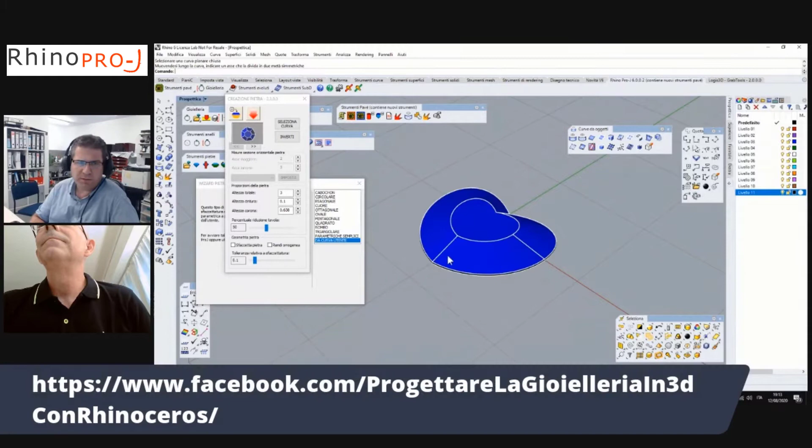For example, I can select my personal curve, starting with a custom curve that I created myself.

I can change the dimension, because the software is parametric. And this is my personal stone.

In this case, I can create my personal bezel here, through the shape of the stone.

Yes, it's very easy to use because it's very simple. You can change the measure and it is very, very easy. It's a system made to be very intuitive.

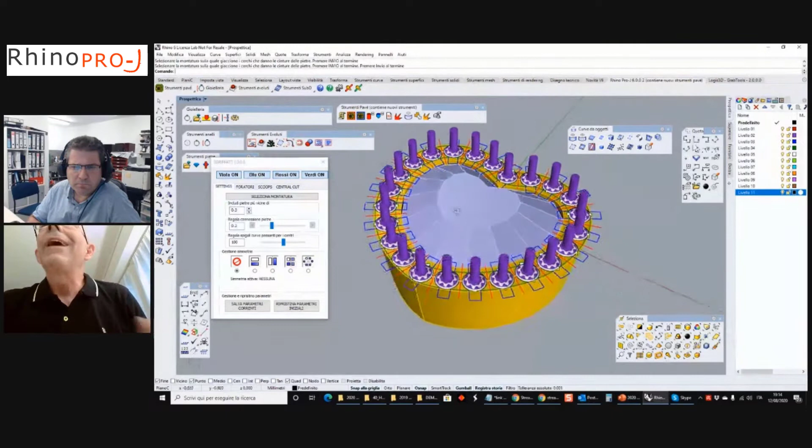This is another plugin, very interesting, because it's possible to select the bezel and the software creates the drill to prepare the model to set the stone. Another interesting function of the plugin is to directly create the cutters on the ring we've generated, the bezel in this case, so it can be set.

Yes, and this is finished because the software creates all the drill, also inside. And this, you can see, is the drill. The software has automatically created the cut for setting the stone in the piece.

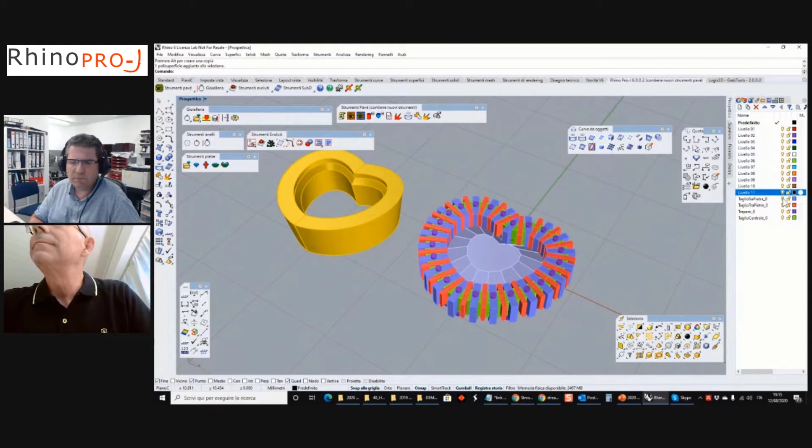For example, I have my personal stone, and another application is to create a ring. This is very simple. I can define the diameter, for example 16, and select my stone. Here we've taken the same stone from before, the custom one, generated a ring, and applied the design of this ring with our stone automatically.

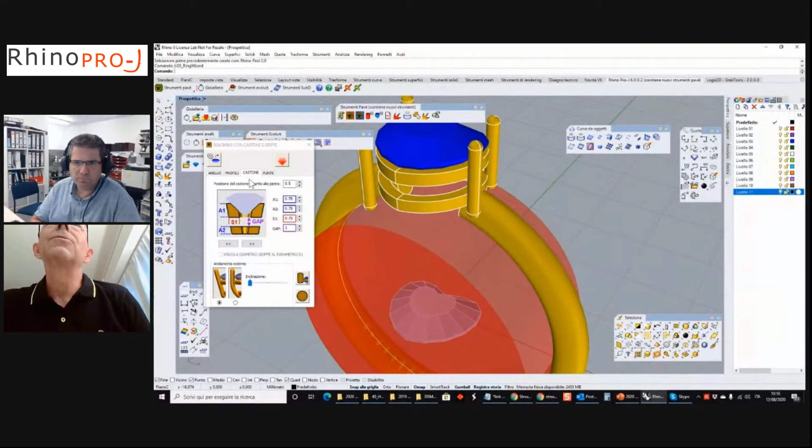Here it's possible to change the profile. We can change the height of the stone, because the software in this case is parametric. Since the software is parametric, we can adjust the profile of the ring's arm, the height of the stone's setting, or the position of the prongs.

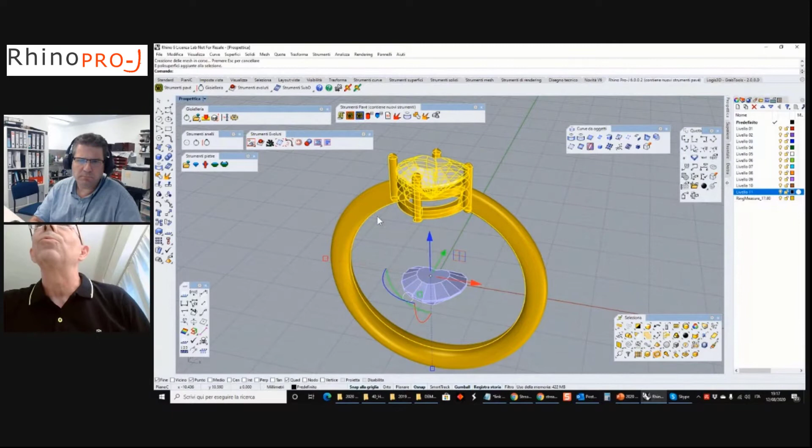And when I decide all the stone, all the parameters, the model is very easy to create. Once the parameters I want are selected, it's very easy to generate a classic jewelry ring.

For example, another example: we can create 3.2, for example, okay, this, and now I want to create a trilogy. Now we change the stone for a more normal one and move on to creating a trilogy ring.

It's enough to select my stone, change the bezel. In the top view we can define the position. We generate our trilogy ring from the stone. From the top view we can more easily adjust the position of the prongs.

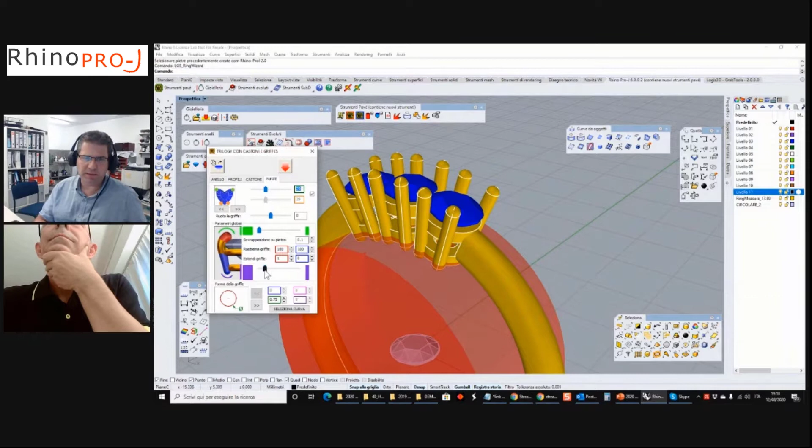We can change the parameter here, changing the parameters of the arm.

And the ring now is ready for production. But, for example, when I apply the Boolean operation, the model is finished. But if it's necessary to create the rendering, it's not very good to have straight prongs. But I prefer, for example, only for the rendering, to have this.

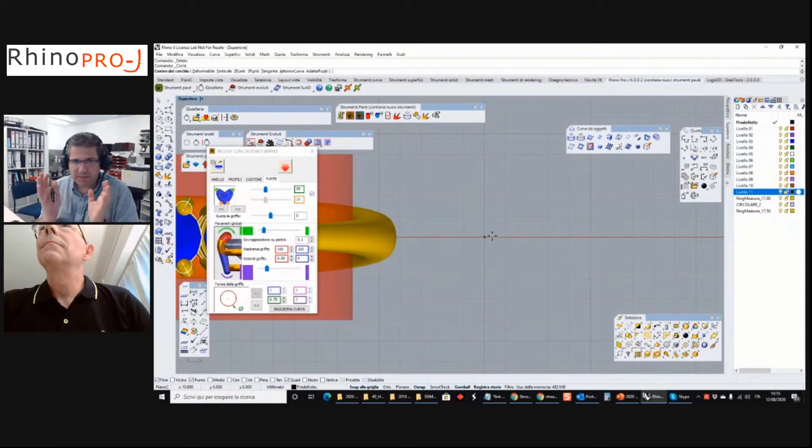Yes, for example, I want to create my personal... I have a question for you. Yes, I have a question.

This possibility of moving the prongs, of closing the prongs, is it also good for wax setting? Yes, of course, yes.

Quería comentar que esta posibilidad de girar las puntas hacia adentro es buena, como él dice, para el render, pero también es buena si vamos a hacer engastado en cera, porque necesito que la pieza quede fijada y no se caiga después durante la fundición. Entonces, para hacer el wax set, es decir, engastado en cera, también va bien esta curvatura de las puntas.

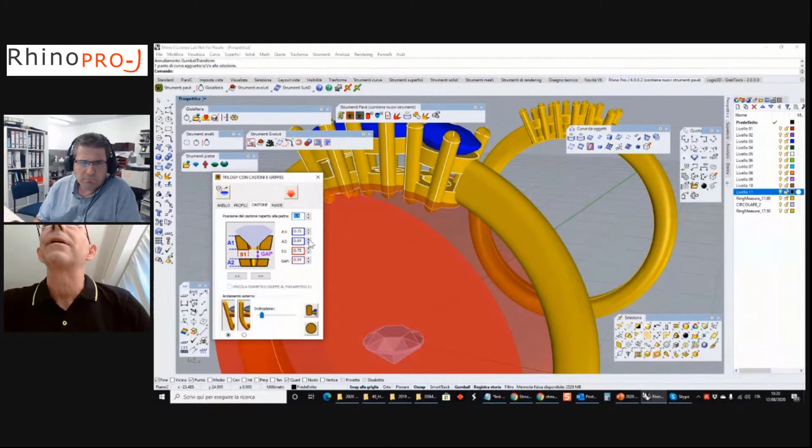Yes, for example, if I want to create my personal griff, it's possible to change any parameter you want. It's very, very easy. But if I want the griff with this section, I select my curve, and you can see I have my personal griff.

Ahora, para cambiar los engastes, las puntas del engastado, la forma no tiene por qué ser redonda. Él puede coger cualquier forma, en este caso ha cogido una línea de corazón, y la ha aplicado sobre la pieza para que las puntas queden con forma de corazón.

And this is my ring, very, very easy. Of course, we can change, for example, the diameter, for example 17. I'm going here, and this is another one.

Por supuesto, es tan sencillo como cambiar el diámetro del aro para cambiar la medida del anillo, manteniendo la pieza y poder generar todas las medidas automáticamente, con un solo clic.

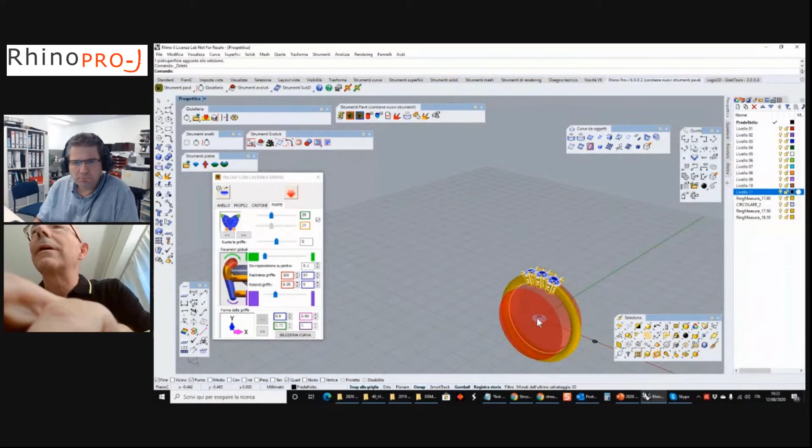Other application on classic jewelry, for example, we can use other function. Okay, and now I can create, for example, the wedding ring, for example, I use this.

The philosophy is the same because I can set, for example, the diameter, okay? I can define a stone. In this case, for example, I can set a square stone, 3.2.

En este caso, ha cogido la posibilidad de hacer una alianza con piedras y ha cambiado la piedra. El sistema es muy similar al de cualquier otro tipo de anillo clásico. En este caso ha cambiado las piedras para meterlas, por ejemplo, una piedra cuadrada, que quedaría muy bien en ese tipo de pieza.

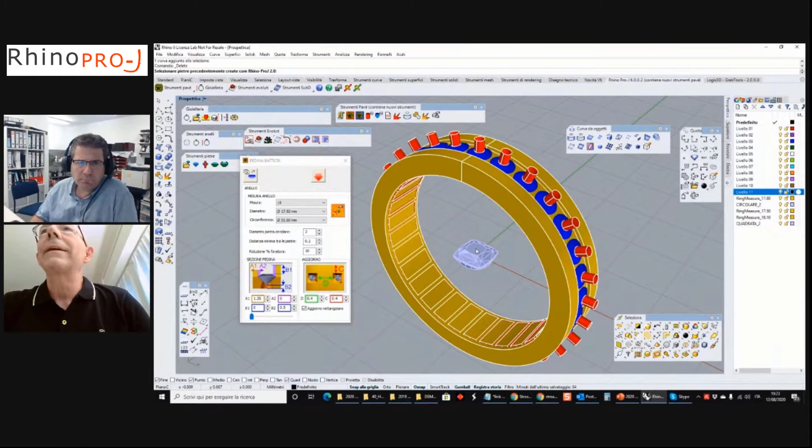In this case, it's enough to select my stone and the software changes. Here it's possible, of course, to change anything you want. When you decide, for example, the distance from the stone, you can see.

Ahora, por ejemplo, está cambiando la distancia entre piedras para que visualmente quede más el efecto que desea y editar cualquier otro de los parámetros de la alianza.

And then the software can create the final model. Ahora ha creado el modelo final, como vemos, realizando incluso los taladros para las piedras.

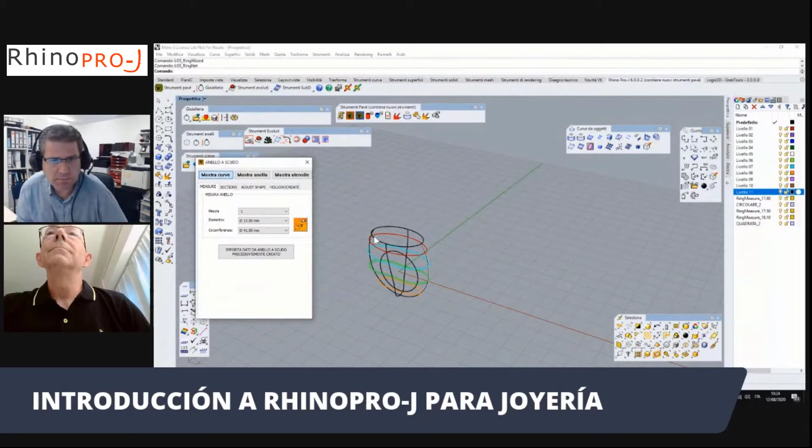Okay, the next function for jewelry is, for example, to create a shield ring. La siguiente función será crear un anillo de sello. Cambiamos el diámetro. Yes, here we have some profiles, but we can define, for example, my personal profile. Tenemos algunos perfiles en la galería, pero podemos crear el perfil que queremos personalizado.

Yes, now I apply the fillet. Okay, and I can select my personal curve, user curve. And this is my ring. Ahora ha generado la curva, la ha unido y finalmente la ha aplicado sobre el anillo para que tenga la forma de la curva que le interesa, que ha creado.

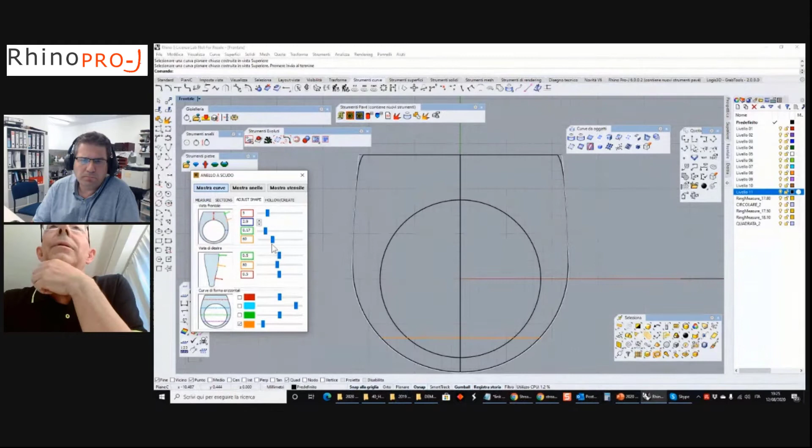Of course, it's possible to change the shape very easily. You can see I can change the profile of the curve. Fácilmente se puede cambiar el perfil de las curvas que generan el anillo.

Yes, and for example, we can create the drill to remove the material inside. Es también posible generar el taladro que agujereará el interior del anillo para que sea hueco.

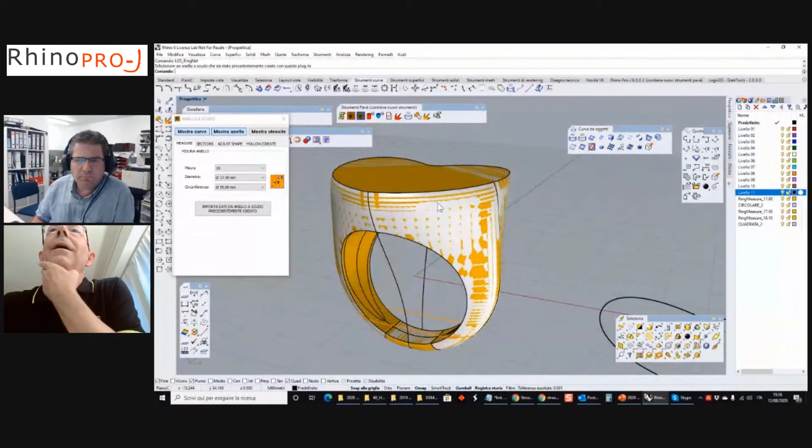For example, now I have my ring. Yes, it's interesting because I can create my personal database, because when I reopen Rhino, for example, I can select my ring, and if I want, it's possible to change the diameter. Es interesante que podemos crear nuestra base de datos personal y retornar a nuestro anillo para hacer las modificaciones que estimemos entre tamaño, forma, etc.

Y crear, por lo tanto, una colección muy rápidamente, o unas variaciones del mismo modelo. Yes, this is the second one with a different diameter. En este caso, el primero y el segundo tienen diferente diámetro para dedos distintos.

Okay, but it's possible also, for example, to apply not a shield but a rounded surface. Está bien, es posible crear un anillo de sello, pero en vez de ser rectilíneo como el otro, con curvas más redondeadas.

Okay, this is the ring. You can see it's not flat. En este caso vemos que no es liso, sino redondeado, como hemos comentado.

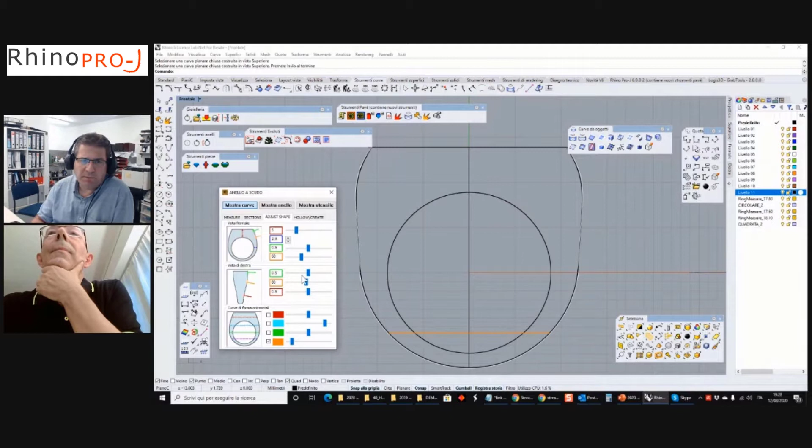Now I change the dimension. Cambia las medidas, the profile in right view. Okay, and in this case, this is the drill. I can change, for example, inside or...

Ha seleccionado el cortador y ahora está cambiando el formato interno. But it's possible, for example, to add some particular curve, for example, code, yes.

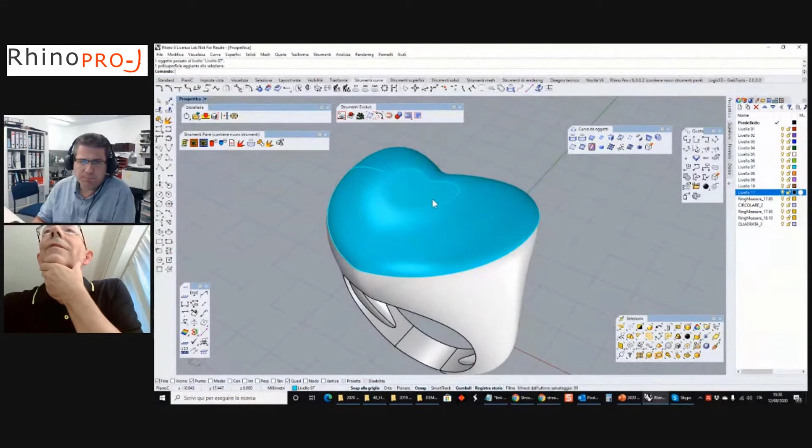Okay, this is my personal ring, and now I want to apply the second function of Pro-J, which is Pave Tool. Now we have our customized ring, but now we're going to create a pavé on it with the Pave Tool. For the software, it's important to tell it where I want the stones. The first thing to indicate is where we want to place the stones, and that's done by defining the curves. Yes, this is the polysurface where I want to put the stone.

The software asks me to select the polysurface where I want the stone, check the direction and the inner part, and you can see the polysurface become gray. This means this is the polysurface where I want to put the stones. The software asks us to define the polysurface, confirm the direction of the surface and the inner part of it. Once we've selected all this, the polysurface I'm going to work the pavé on is marked in dark gray.

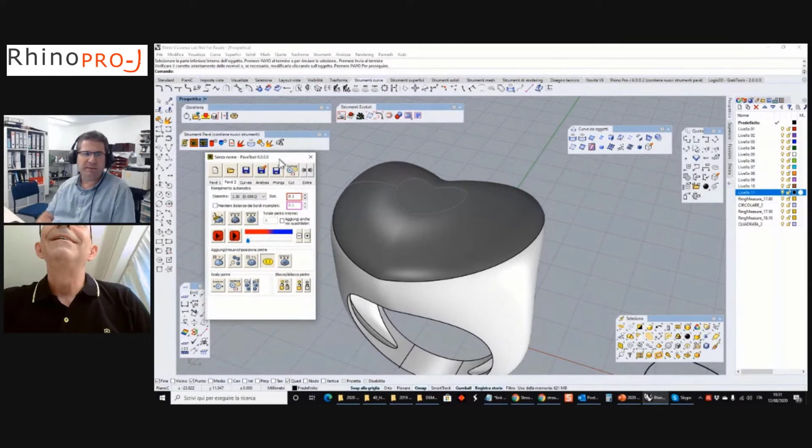Now I want to show you the editing. This is a very important function, because the most important brands in Italy use Pave Tool to create wonderful rings. But this is very complex, and we don't have time to show all the functions. The editing possibilities for pavés are very complete in the software. There's a very large company in Italy, probably the largest jewelry manufacturer in Italy, that uses this tool, and it's very complex. But we'll show the basic parts for generating these pavés.

Okay, now I wanted to show you the editing of the software. Of course, it's possible to add manually, for example without overlapping. With the keyboard, it's possible to change things, only using the keyboard. Using the keyboard, it's possible to place stone by stone, and with the keyboard I'm adjusting the size of the stone, and I can tell it I don't want it to exceed the level.

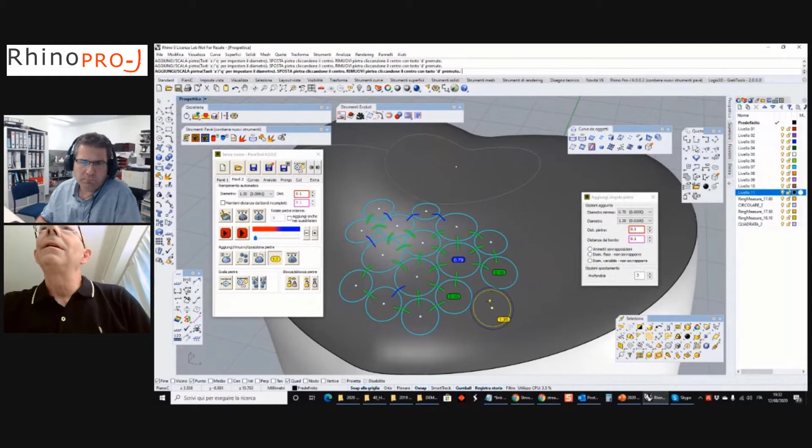Yes, this is editing. In this editing, it's possible to move the stone. You can see I move the stone, but this number 3 is very important, because, for example, if I change it to 1, it's only possible to move one level. It's possible to move the stones we've generated, but we can also define, as he mentions with 1, 2, or 3, the zone of stones that move, meaning keeping a movement zone that isn't complete, but partial.

You can see that when I move the stone it becomes gray. This means that the position of the stone is fixed. When we mark the stones so they turn gray, those stones stay fixed in that position and they won't move anymore while I continue editing the rest of the pavé set.

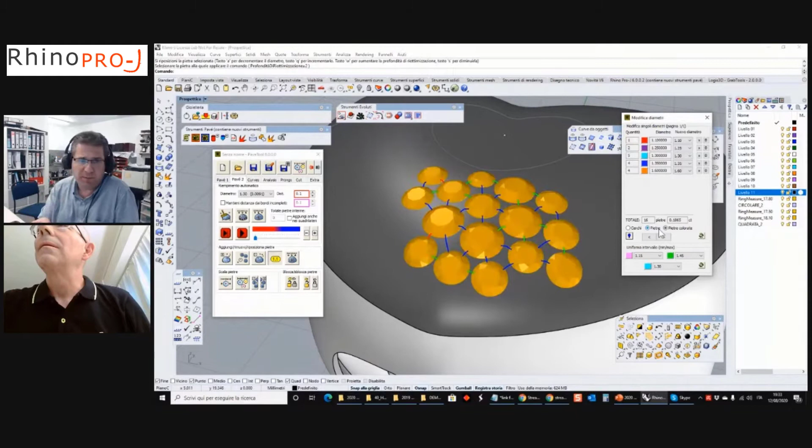It's possible to see the circle, but it's also possible to see the color, because we can define, we can take the stone from the database. It's possible to simply see the circle, or you can see the stones, even the stones in colors, marking a different color for each stone size.

Of course, it's also possible to change the diameter in real time. You can see, maybe it's better this way. Okay, I use the keyboard, Control and Shift, and it's possible to change the diameter. It's also possible to change the size of the stones in real time, as shown now.

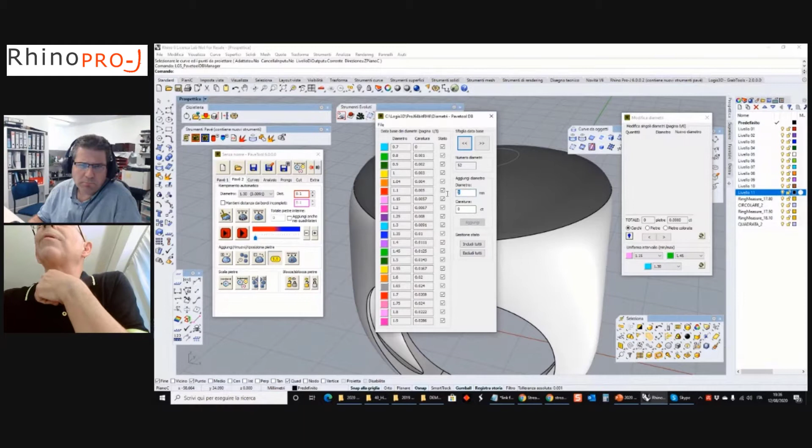We can set the stone, of course. For example, if you don't have your personal stone, go here, open the pavé database, and you can see it's possible to add my personal stone, for example 1.85. This is my personal stone. It's possible to personalize my database, the stone database with our real or personal stone measurements that we have available.

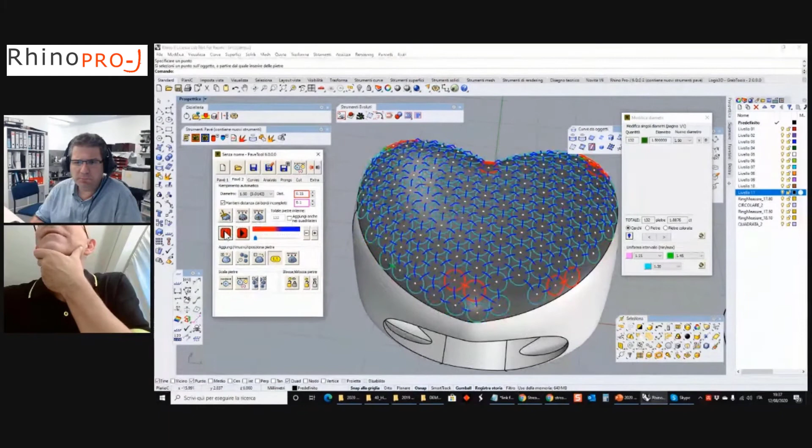In the first step, this is very easy to create the pavé. I define the diameter of the stone and the distance between stones. A good way to do it is first define the diameter of the stone and the distance between stones, I can set the orientation of the pavé - we select the orientation of the pavé - and this is the first solution.

Of course, the model is symmetric. We can activate the symmetry. If the model is symmetric, as is the case, I can activate the symmetry function.

You can see it's not very good. This solution is not for high jewelry because you can see it's not correct. But going here, with the keyboard I can change the diameter. This solution is fast, comfortable, but maybe not the most adequate for high jewelry, because the shape isn't perfect. However, we can start like this and create some stones at another diameter to correct the shape.

Yes, but you can see it's very interesting. The solution is very regular. This solution is very interesting and also achieves a very regular finish.

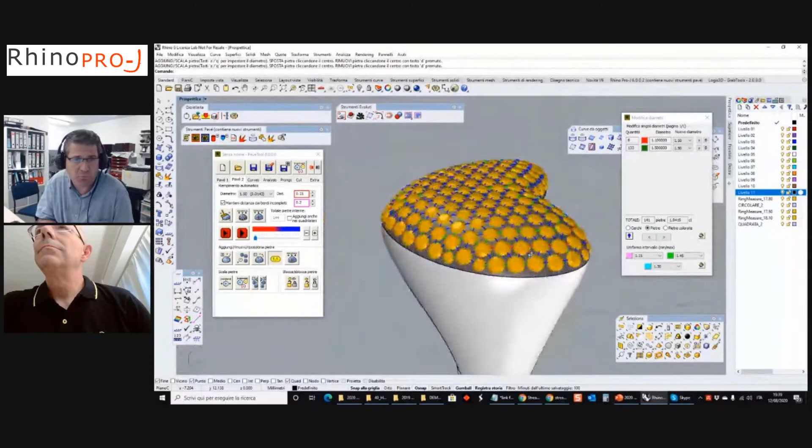For high jewelry, it's necessary to use another solution. For high jewelry it's necessary to use another type of solution. This solution means creating, filling, putting the stone in a very exact way at the edge. For this type of solution, for high jewelry, it's necessary to control very well where we place those stones.

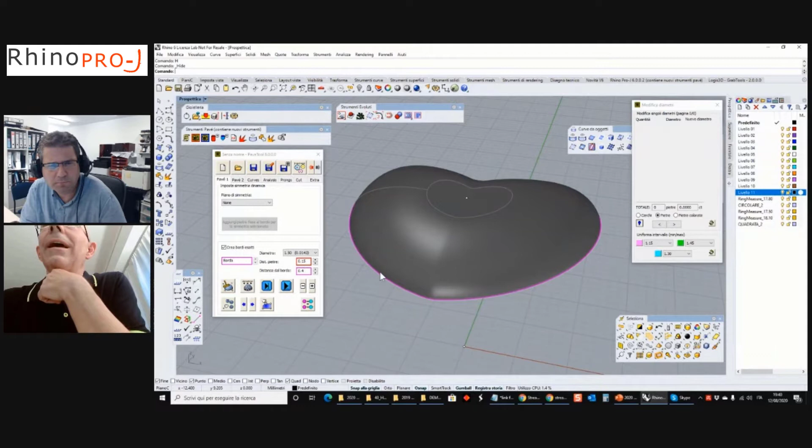You can see when you activate exact edge, you can see the purple line, and I set the distance between stones, the distance from the edge, 0.4 for example, and the software places the stone. In this case, it selects the pavé boundary line, we tell it the distance between stones, but also the distance we want from the bottom of the line - in this case 0.4 millimeters - and it creates the line for us.

Here you can move the stone, you can see it's possible to move the stones to achieve the central point as the base that interests us.

For example, but in this case it's important to put one stone in this position, in symmetrical configuration. In this case, for example, it's very convenient to have a stone centered exactly at the symmetry point so that the pavé comes out perfect.

In this case, I define and check this point, and I remove all and apply again, and you can see the stone become gray. This means that it's exactly where I want the stone.

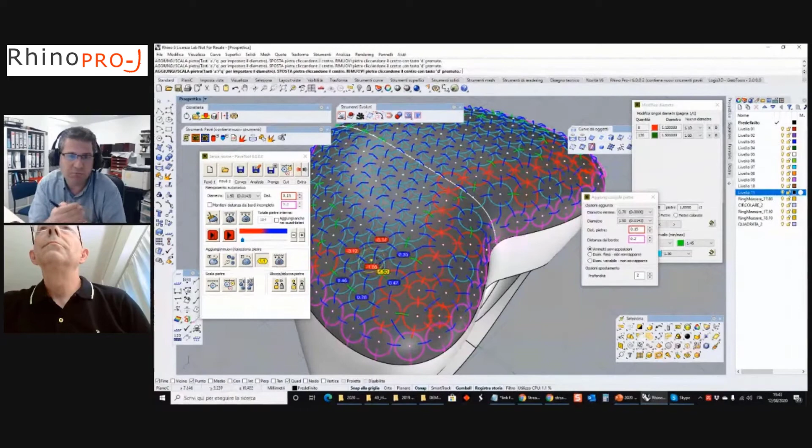El segundo paso será rellenar la superficie con piedras. Of course, the pavé doesn't have a solution because there isn't a mathematical solution, but the software, you can see, is important in this case to activate symmetry. El pavé, manteniendo el tamaño de la piedra como hacemos nosotros, no tiene una solución perfecta, porque siempre quedará alguna parte donde no es posible poner una piedra de esa especialidad. Pero nos acercamos a ello y aplicamos la simetría, añadiendo alguna piedra más pequeña para crear el pavé más perfecto posible. You can see this is a very good solution, the pavé is good in this case.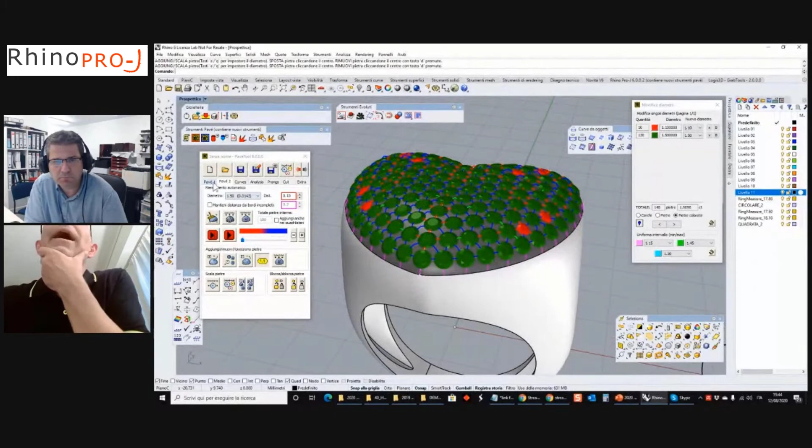En este caso vemos, por eso es una solución más profesional, como el pavé, vayamos al punto que vayamos, crece bien, perfecto. You can see we can solve the pavé using the first important diameter, 1.50, and only 2 different stones. En este caso hemos generado un pavé profesional, perfecto, en una polisuperficie con solo un diámetro principal y un diámetro de piedra secundario. And you can see in some minutes it's possible to solve the pavé. Como vemos, en pocos minutos es posible generar un buen pavé.

Of course, when I finish, it's possible to save the pavé. También es posible salvar el pavé. My pavé. The file name is PTD, pavé tool data. El formato es pavé tool data, que es PTD, que es el formato en el que se guarda la configuración del pavé, ¿se entiende? Para otras piezas que quiera generar igual.

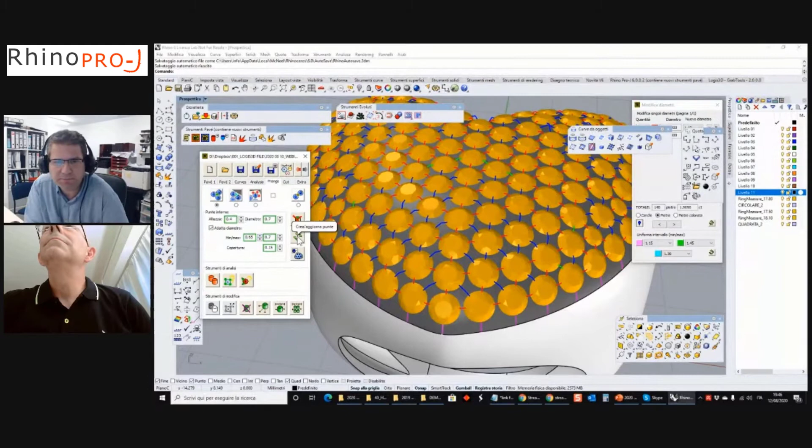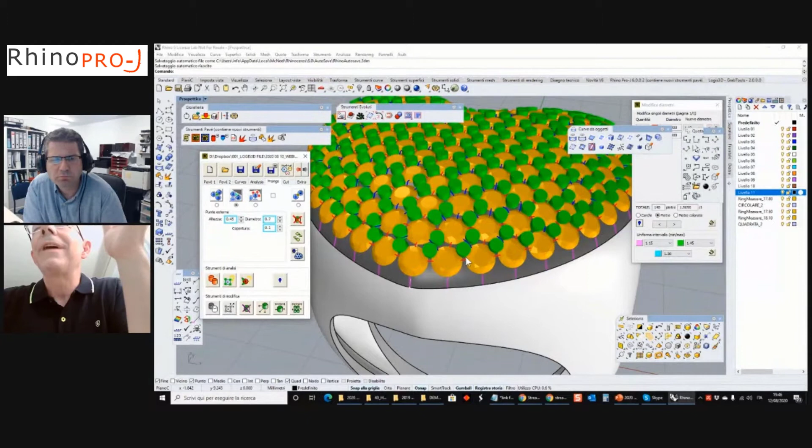Now, for example, the next step is to insert the prong. El próximo paso es generar las puntas del pavé, del engastado. I defined the height of the prong. Metemos la altura de las puntas o garras. This is very important, you can see it's possible to create the prong inside with a different diameter than the prong outside. Es posible también generar en este software un diámetro distinto de las garras interiores del pavé que de las garras exteriores. This is very important because it's necessary to have the diameter outside bigger than inside. This is important because we can have a very, very strong pavé. Esto es muy importante porque la garra exterior es la que soporta el peso estructural del pavé. Entonces es muy conveniente que las garras exteriores sean más grandes que las interiores.

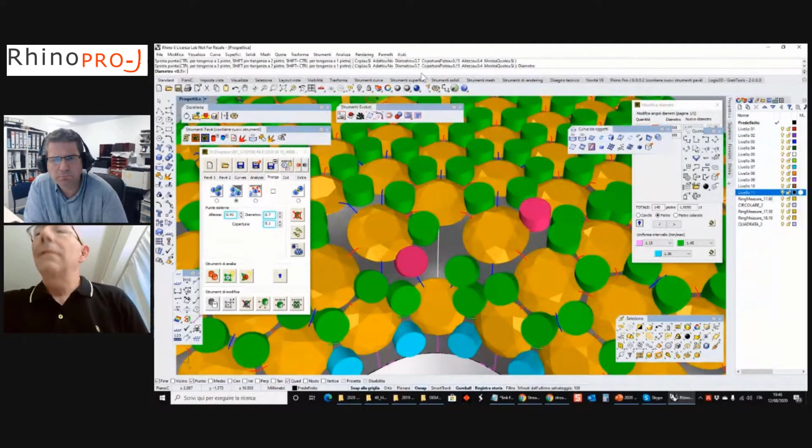Of course, we can have many functions here for editing the prong. Existen muchas funciones distintas que me permiten desde el software editar estas garras o puntas que sujetan las piedras. For example, we can change the diameter only using the keyboard. Incluso utilizando simplemente el teclado puedo modificar los diámetros. Or we can move, for example, find the tangent between only one stone, 2 stones, or 3 stones. Incluso podemos moverlo buscando la curva tangencial entre las 2 o 3 piedras de alrededor. When I decide the prong is okay — for example, in this case it is not correct — but of course, I need some minutes to create, not only 5 minutes to create the pavé. It's necessary more time. Lógicamente necesitará un poco más de tiempo, más de 5 minutos, para realizar el pavé, pero...

Okay, now I want to create the prong. You can see the prong, we have many different types, for example this one, and also personal prongs. También podemos definir la forma que tendrá la garra. En México le llaman uñas, no sé cómo lo llamáis en Colombia. Es posible modificar la forma de esta garra a una de las que tenemos en galería o a una especial que diseñemos nosotros. In this case, the software applied the Boolean operation, you can see. En este caso, el software ha aplicado la operación booleana al acabar de configurar las uñas.

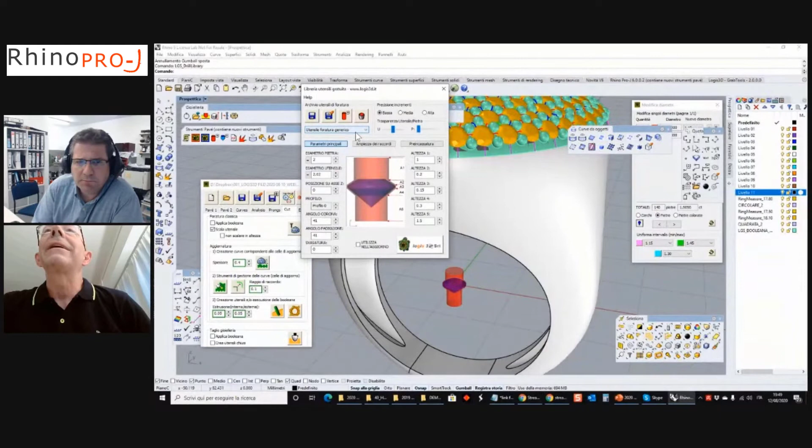The next step is the cut. El próximo paso es el corte. In this case, we use the plugin, the name is Drill Tool. It's possible to create a parametric drill to cut the model. Utiliza la herramienta de taladro, Drill Tool, para realizar el corte de las garras. Of course, the software created the drill, you can see the drill, and you can see the layer where you can find the drill.

El software te permite ver dónde está la capa en la cual ha realizado el taladro. Pero en joyería esta no es la mejor solución.

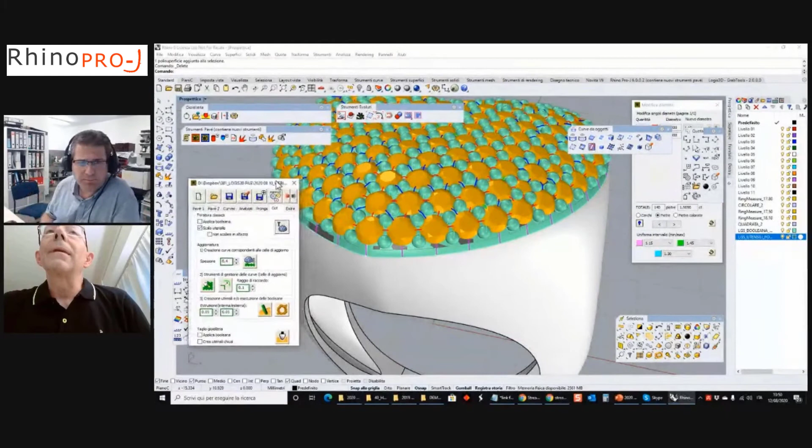Yes, en joyería de alta calidad es necesario crear el ajour. El ajour es muy, muy potente. Es necesario en alta joyería crear lo que llamamos el ajour. No conozco palabra en español de eso.

Because in this case, to create the cut, it's necessary to tell the software where I want the cut. Es necesario decirle al software dónde quiero realizar el corte.

And in the cut, I want to create the cell. Entonces tengo que crear la celda del corte. The software tells me: select the curve. El software nos dice que seleccionemos la curva. And now the software can create the cell.

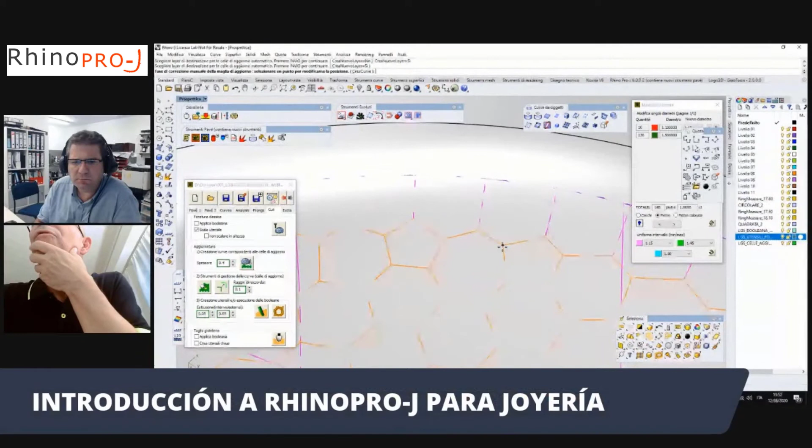You can see, yes, and it's possible also to change. El software crea las celdas y es posible también editarlas. Create curve. Some cell is not very good, but the software tells me this. Okay, this is not good.

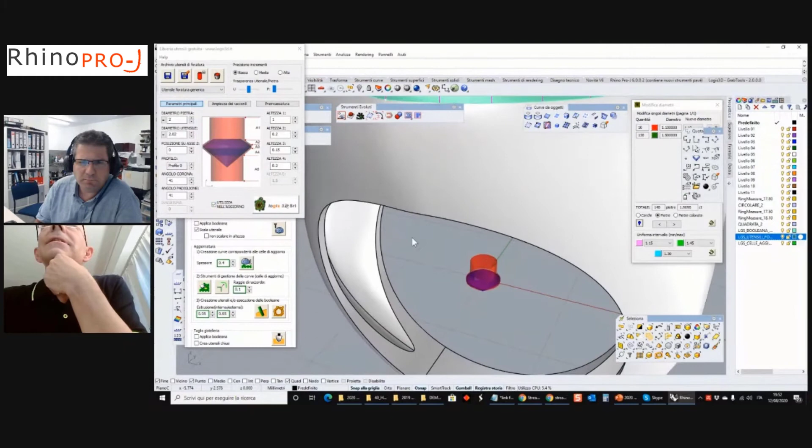Yes, and in this case, I want to create the drill. This is the drill. En este caso, crea el cortador. And then it's possible to create the drill.

I need to verify that all the cells are closed. Necesita confirmar que todas las celdas que ha creado están cerradas, porque si no falla la herramienta. Yes, because, yeah, okay, it's okay.

And for example, we can create only the drill. I select this, you can see the red point. The red point is the center of the stone. And then I can select the cell. Crea el cortador que está en el centro de la piedra, selecciona las celdas.

And now here we have all the drill. Y ahora ya tiene realizados los cortes.

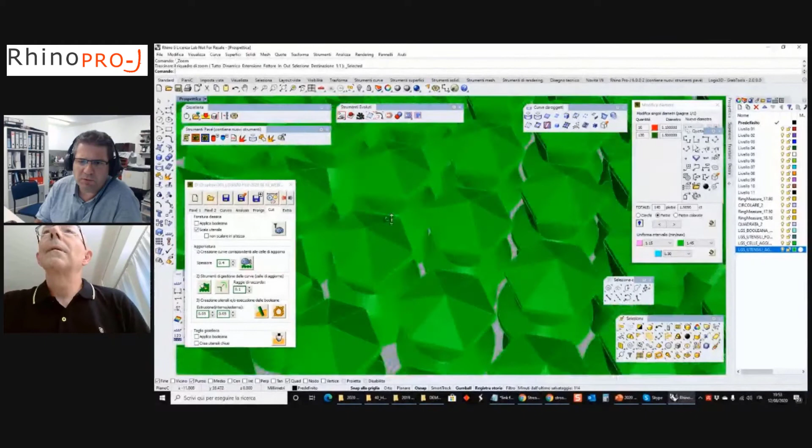This is very interesting, this value: 0.05 by 0.05, because this is very important to give the pavé more light, and the ring is not so heavy. Este parámetro que vemos aquí, esta altura que tiene en la parte baja, que en este caso es de 0,05 por 0,05, pero podemos editarlo. Esto es muy importante para dar luminosidad al pavé, para que entre más luz por debajo. No sería lo mismo que cortar en recto, sino que sea más grande la entrada que se va estrechando. Este pequeño corte le da mucha luz al pavé.

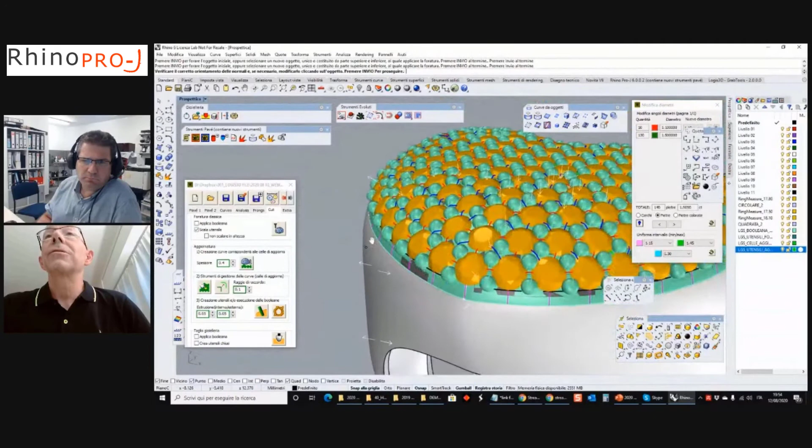Now I want to apply the Boolean difference. Apply Boolean: the software asks me to select the model, this model, and this. Okay, the direction is okay. New layer, okay. The software asks me to select the drill, the red point, enter.

And now I need to select the cell. In this case, I don't want to select all the cells because it takes too many times to apply all the Boolean difference. Ahora va a realizar una booleana distinta en la que selecciona las diferentes superficies, y como este tipo de booleana es más lento y más complejo, lo que hace es seleccionar solamente unas cuantas celdas, pero podría hacerse perfectamente en todo el resto del anillo. Pero tardaría más, claro, la operación.

In this case, the software creates one cell, applies the Boolean difference, then deletes the old drill and applies a new Boolean. This is to reduce the time of the Boolean operation. Yes, it's finished. Puede hacerlo por partes para reducir el tiempo de booleana.

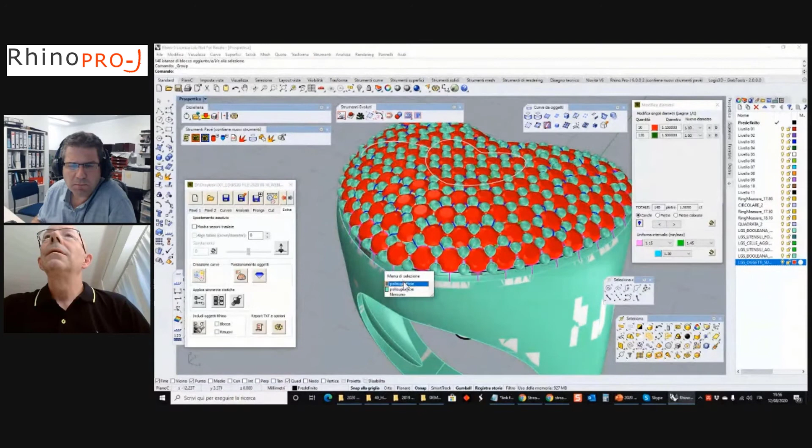Okay, and I'm going here. Selecciona, selected. Okay. Yes, this and this. Y ahora vemos los taladros.

This is of interest not just in Italy, but in the world, because it's very, very beautiful. The solution is very beautiful. The pavé takes more light and the model is not so heavy, because now the price of gold is very, very high. It is important to reduce the weight of the ring.

Este sistema de generar los agujeros con más luz, digamos, con esta entrada de luz mayor gracias a este rebaje exterior, aparte de que le da mucha más luminosidad al pavé, nos permite también ahorrar costo, porque ahora que el oro está tan caro, si podemos reducir esa cantidad de oro, la pieza pesa menos.

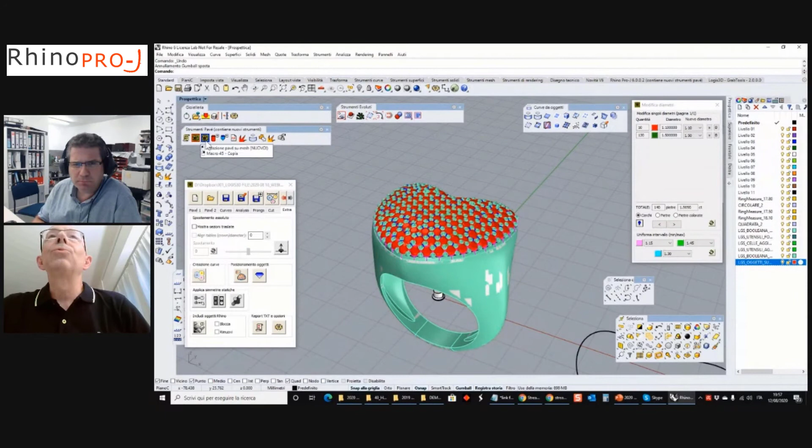Yes, okay, this is the solution for the polysurface. And now I wanted to show the pavé tool applied to mesh. We have seen the pavé tool solution for polysurfaces, and now we will see the pavé tool solution for meshes.

In this case, I use another plugin that you can find on Pro-J, called Art Tool. With this plugin, it's possible to create a 3D model starting from one image. For this we will use a Rhino Pro-J tool called Art Tool, which allows creating 3D models from a photograph using light and shadow.

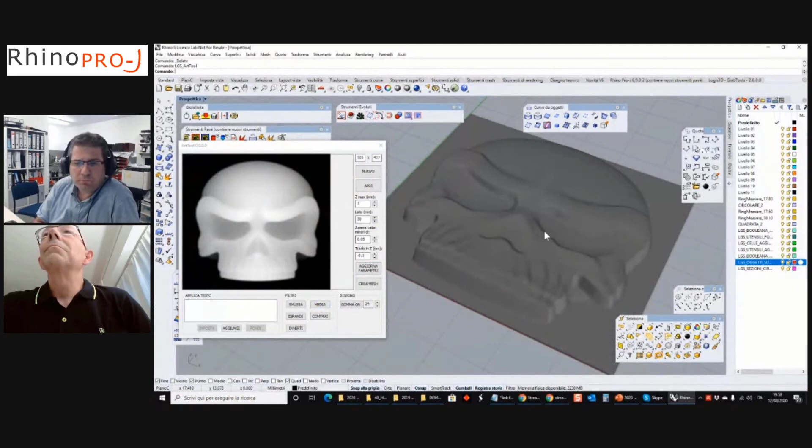Yes, this is, for example, it's possible to add text. It's possible here to write and apply the text on the image. With this Art Tool it's possible to write a text and have that text applied on the mesh.

Now I have the model, and in this case it's necessary to remove the bottom mesh. In this case it's necessary to cut the lower part of the mesh. I apply trim mesh, a tool called Trim Mesh.

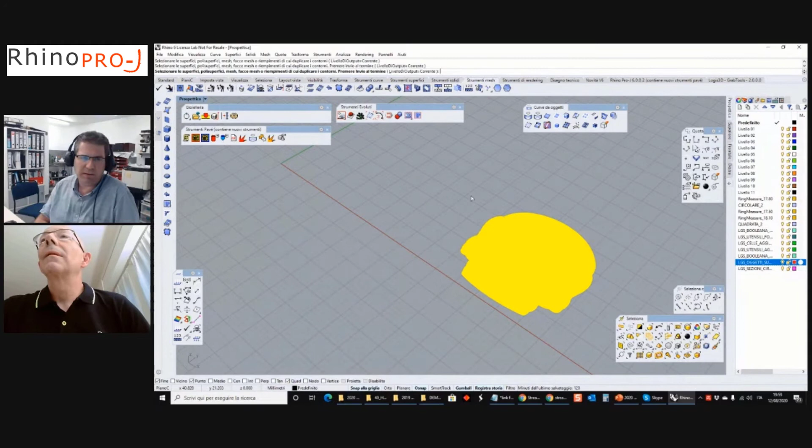But now it is very easy, for example, to create a ring from this shape. It's very, very easy to create a ring from this mesh, because I can use this function, the shield ring function.

Shield ring, I want to select, for example, 20. Let's do it with number 20. And my curve is this, okay, this is my curve. Here, of course, we can change all the parameters. I apply my curve and edit the parameters.

Okay, the drill, it's necessary to change this value. Yes, and now I can create the ring. And now the ring can be created.

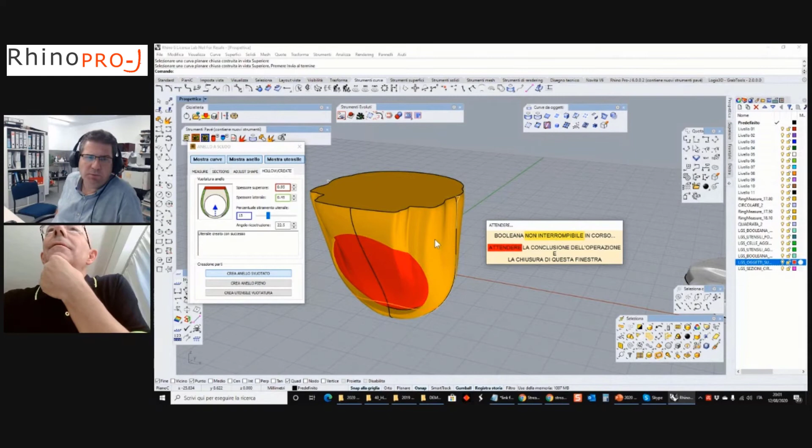This is a very difficult shape, very complicated. Okay, now I take this and I put this shape on top of the ring. Now I select the mesh and place it at the top of the ring. You can see it's very, very easy.

Now it's necessary to tell the software where I want the stone. Now it's necessary to tell the software where we want to place the stones.

For example, this function isn't in Rhino. This means it's impossible in Rhino to create a curve inside the mesh. This is a function that Rhino doesn't have, that is exclusive to Rhino Pro-J, for creating a curve inside the mesh.

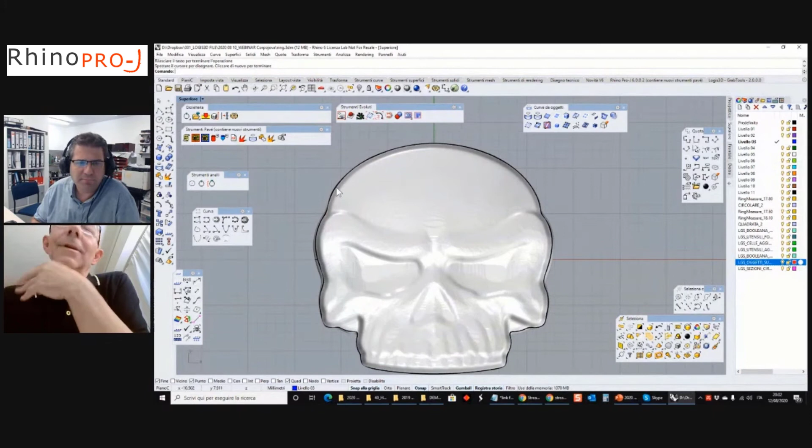Yes, because this is Rhino's function, draw curves on mesh, but you can see it's not useful. This is Rhino's function. To apply, click, this doesn't work very well. I think it doesn't work. But we have another function.

The name is curve on polysurface or mesh. I select this, you can see I can click to apply it, and I decide this is a very good curve. This is the reason it's better than Rhino, on polysurface and on mesh.

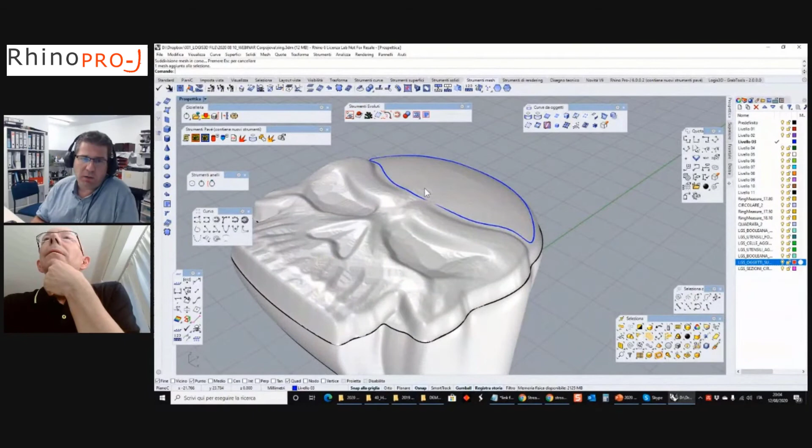Okay, when I decide the curve is okay, in this case I can create and apply, for example, split mesh. Once I've decided the curve is to my liking, I apply it on the mesh in this case, and join it. And this is the mesh - what I do is split the mesh with this curve.

Yes, and I can create pave tool on mesh. So, since I've already cut the area, selected the area where I want to apply it, I can now apply pave tool on the selected mesh. Yes, this is the same function as the previous pave tool on polysurface. The plugin is more or less the same, not the same, but more or less the same - the toolset for doing pavé on mesh is practically the same as on polysurfaces.

I can define the distance between the stones and the distance from the edge. I can, as before, select the distance between stones and the distance to the corner, let's say, to the limit of the curve.

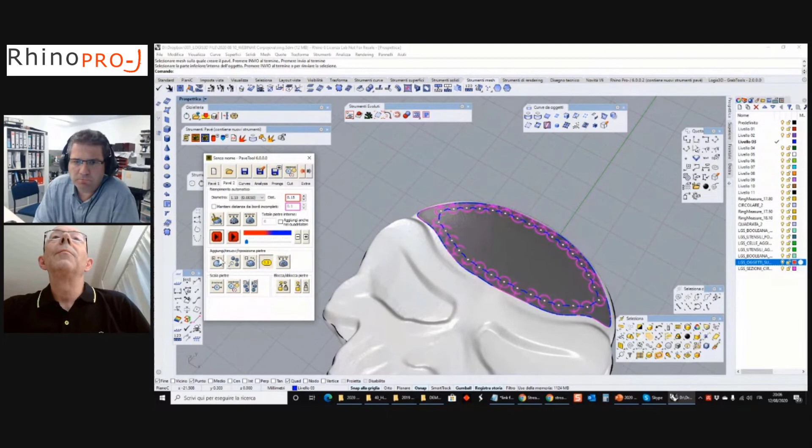Okay, in this case I'm going here more. For example, to not overlap, I can add a stone here, one stone here, and I can fill inside.

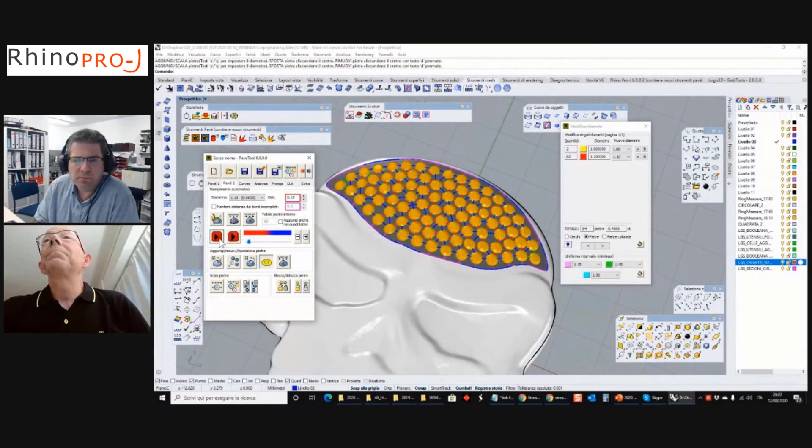And you can see the model is finished. But in this case, of course, we have the same function. For example, we can move, update.

Yes, in the mesh it's not as fast as in the poly surface, because the mesh uses a more complicated algorithm.

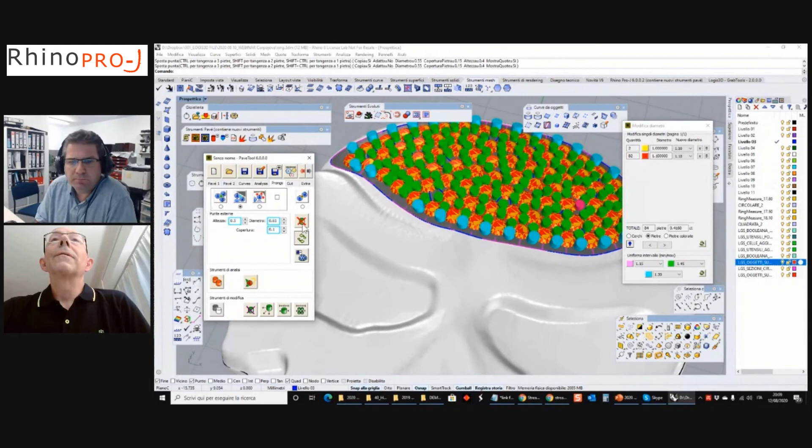Yes, okay, but for example, it's possible to put here. Okay, I can save the pavé, of course, also in this case.

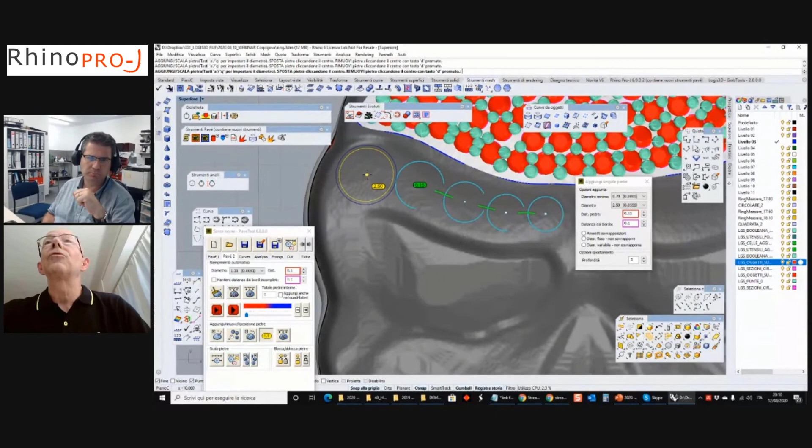Of course, in this case, it's necessary to put the stone manually because... Okay, I want to show what happened. No, yes, because it's very difficult.

In this case, it's possible to apply to all the stone. Sorry, I try, because I don't know what happened.

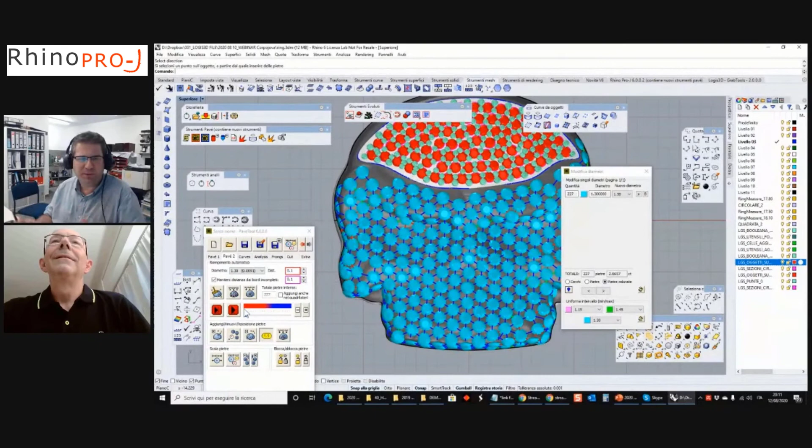Yes, the software... of course, if you prefer, it's a good solution, but okay, now in this case I prefer to use this solution.

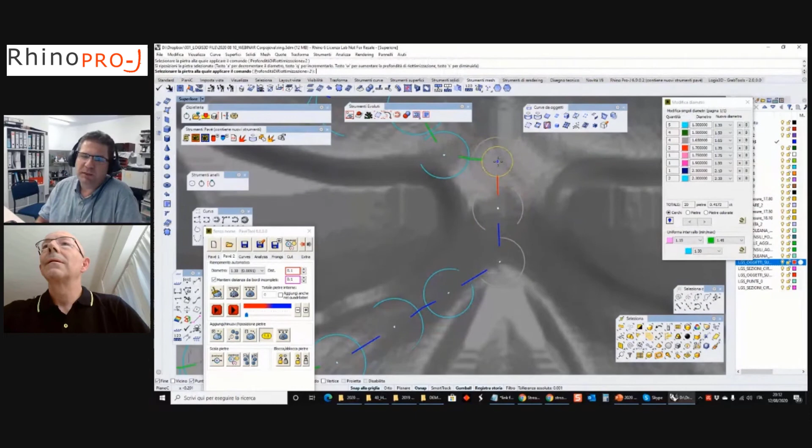Okay, and in this case, I define this, but it's possible to change, of course.

And okay, for example, I can apply mirror. I can select this.

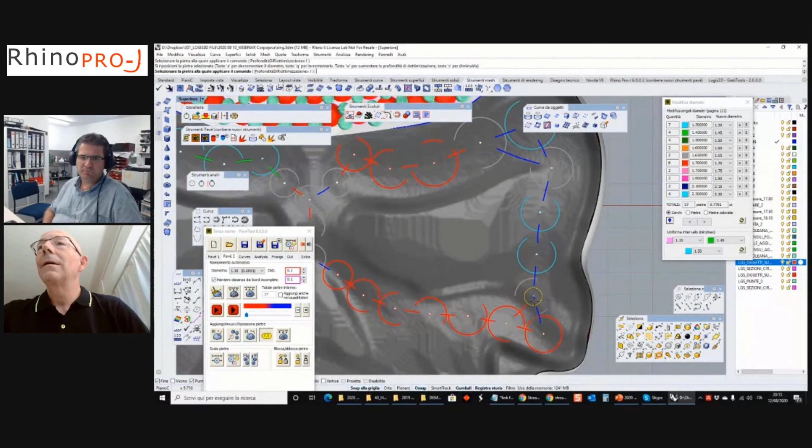Yes, this is the solution. It's possible, of course, to put the stone.

Sorry, to put the prongs.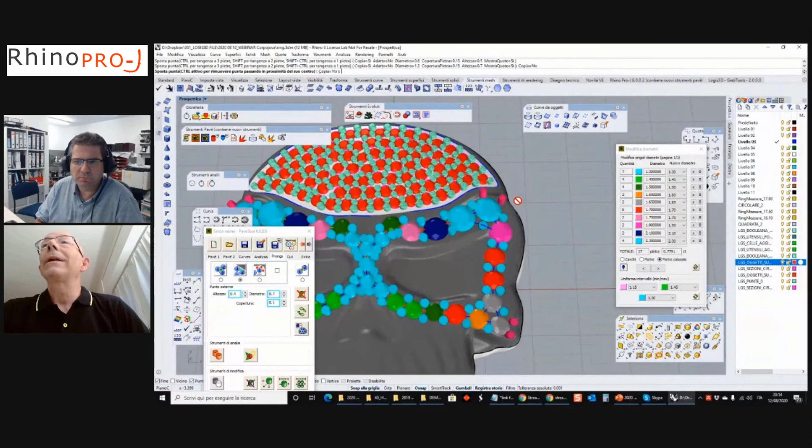Okay, this is not correct. But for example, it's possible to copy, no. When I go here, you can see this is brush technology. It's possible, you can see when I don't make a click, this is brush technology.

It's possible only to move on the stone. When I set copy yes, in this case, of course, diameter 0.6, okay, 0.4, possible to find. He used the brush technology to erase the claws that he didn't like and then regenerated them with another diameter and position.

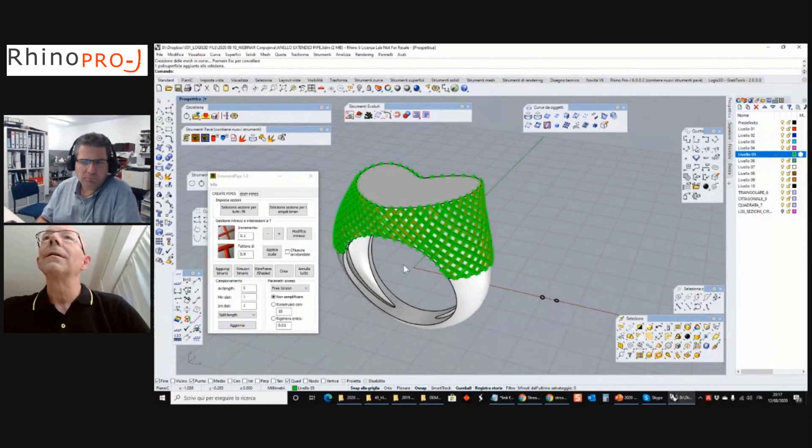And of course, it's possible to change it, it can be any type of section. Yes. You can see this is the model, the real model, of course. Okay, sorry.

And the last function that I wanted to show you is, for example, if I want to put this - this is a polysurface. Another function we're going to show is on this surface. For example, if I wanted to put one letter on the polysurface, for Rhino or for other software, it's impossible. If we want to place letters on a polysurface following it with Rhinoceros or many other software on the market, it can't be done, because this is a polysurface.

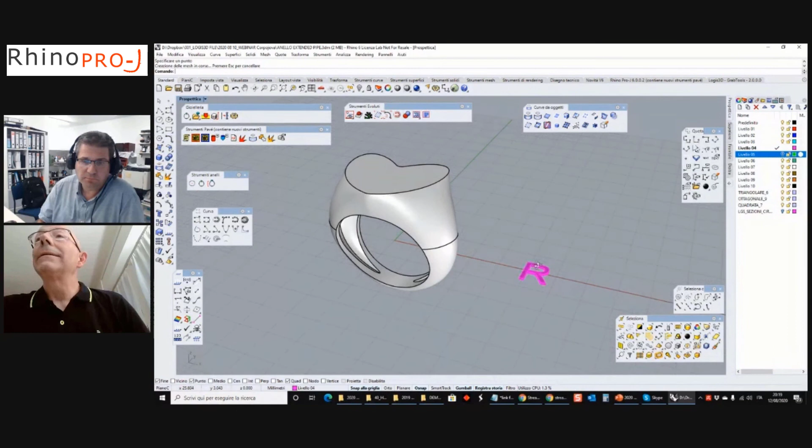And with ProJ, we have a new function, the name is Advanced Splop. You can see it's different, it's not the Splop of Rhino - this is Splop of Rhino, but it's impossible to apply on polysurface. With Advanced Splop, it's possible to set this polysurface curve on mesh or polysurface without deformation. It's possible to perform this function on polysurface and on mesh without any type of deformation.

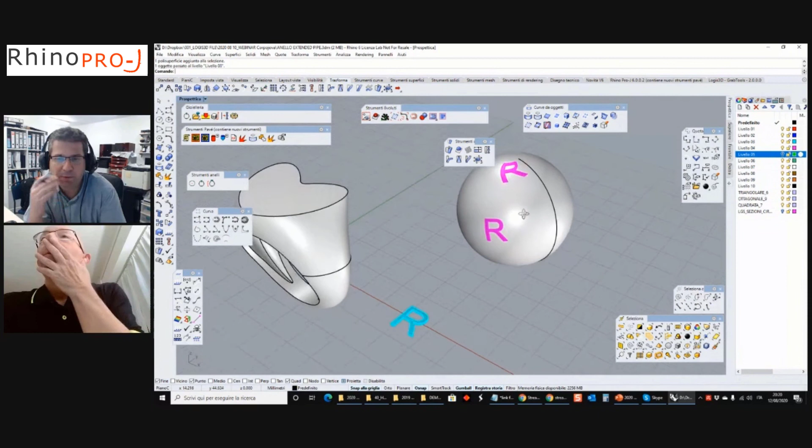For example, with Rhino, if I use this - here is okay, but if I arrive here, near the singularity, you can see it's totally deformed. In Rhinoceros, for example, if I use the Rhinoceros tool, on this front part, yes, it applies the letter correctly, but on the top part it gets deformed by the shape.

With Advanced Splop, this doesn't happen because we can rotate, we can scale the model, we can rotate, and you can see I'm going now to the top where the singularity is, you can see it's not deformed. With the RhinoProJ tool there is never deformation. It follows the shape of the piece perfectly and we can even rotate it, move it, as we want, to place it where we need to. You can see, this is very, very powerful.

You can move on this edge. It's very, very powerful - see that it's even able to fit into a corner like that and follow it perfectly. I can scale, for example, I'm going here. Possible to rotate using the keyboard.

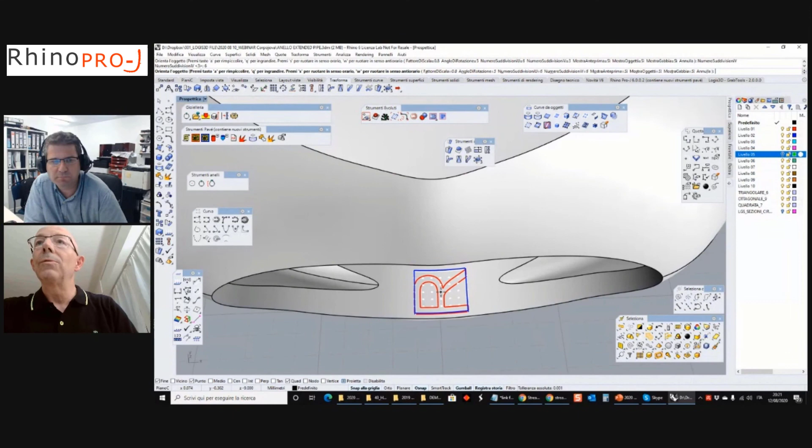Of course, I'm going here. You can see with Rhino this is impossible because this is the edge, dividing two surfaces. It's a good form for putting the carat, for example, or for engraved names or initials, no? Yes, that's what I was saying, it seems a very good solution for making a carat mark or engraving initials, for example, on the piece.